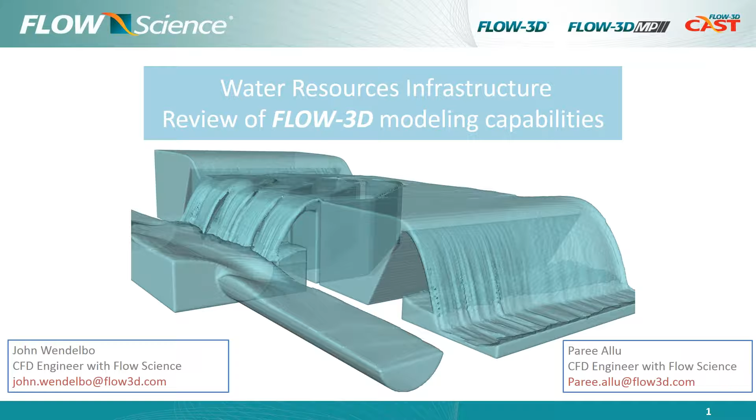And by the way, we have an amazing audience today with engineers from all over the world, from Egypt to the UK to United States, South America, Saudi Arabia, Canada, New Zealand, Australia, Malaysia, India, and Pakistan, and that's the list I have, but I think I'm missing plenty actually. So welcome everyone.

Okay, so instead of going through a list of applications today, I decided to organize topics in terms of physics and models. The idea is that you will all be able to recognize for yourself where these models fit into your own workflow. And if you have any questions, please do not hesitate to email, of course.

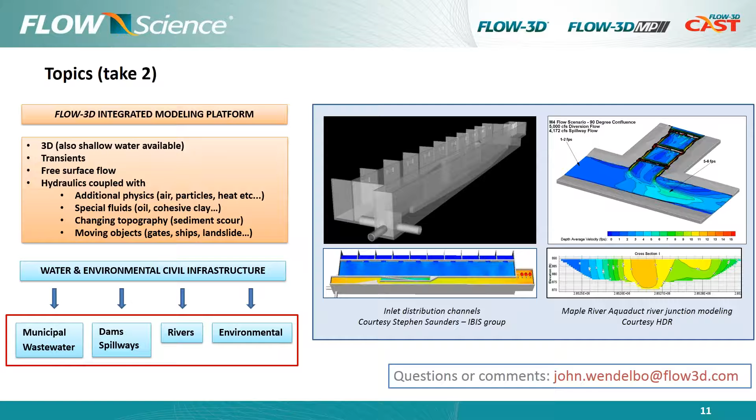These are all ideal applications for Flow3D. Just a selection here, but it gives you a sense of the things where we do very well. So I'll go through some different types of hydraulics that we deal with.

Start with complex free surfaces, and I differentiate that a bit from open channel flows. For instance, you look at the water behind the dam, it's fairly quiescent, but that's open channel flow. If you look at the water coming through the spillway, the aeration, the turbulence, the velocities, all that's quite a bit more energetic, and I think of those a little differently from open channel hydraulics. This is a model from colleagues in Germany, a Flow3D model.

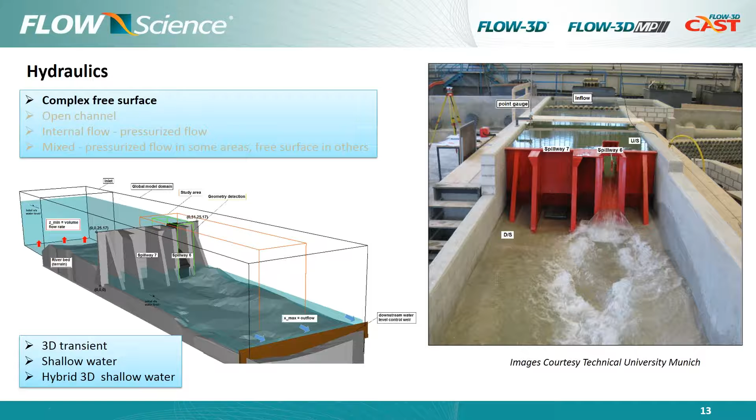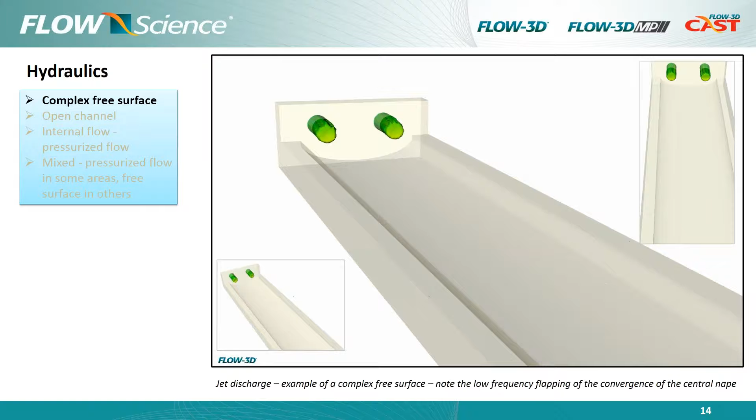So what do these complex free surfaces look like numerically? I like to show this example, it's a very basic one: just two jets, and we can look at the flapping of the converging flow in the central nape. This is exactly the kind of flow where the VOF method, volume of fluid method, especially the one-phase version we implement most often, is really invaluable. While this problem is in general quite a difficult proposition to model, in Flow3D, because of the way we do things, it's actually one of the easiest problems you can set up.

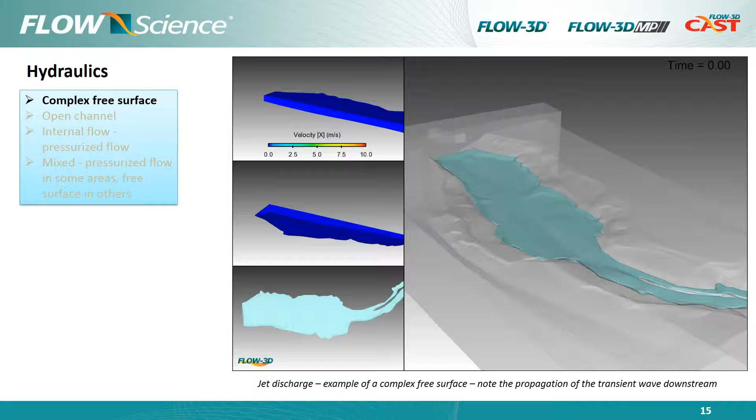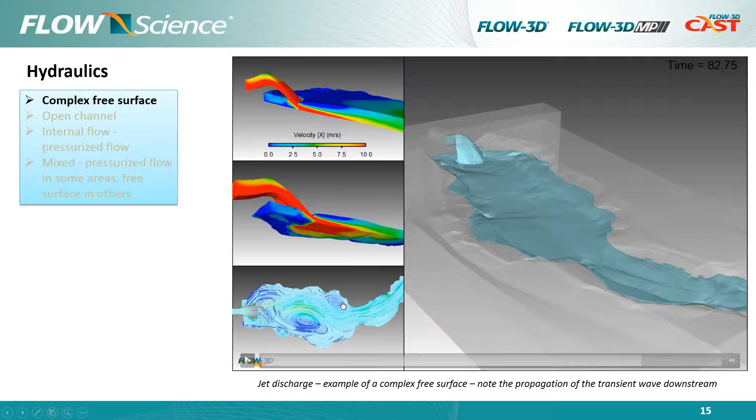A similar problem is the plunge pool, and I'll show you later how this is coupled with a sediment and scour model, and we'll see how the scour develops under the pool. One thing we're interested in is the detail of the plunge pool, but also the subsequent hydraulics of recirculation regions - all important for bank erosion. So that's also something you get out of these simulations. It's not just the hydraulics where the plunge pool impacts the water and hits the bottom, it's also the additional circulations that happen in this region.

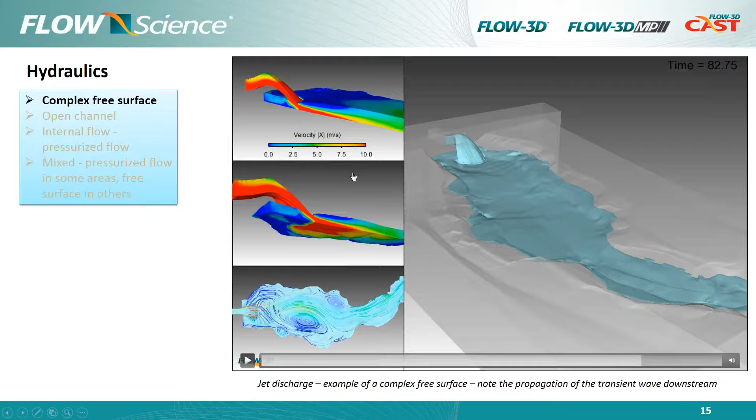Spillways are obviously perfect candidates. Normally Flow3D is used for discharge analysis as well as super elevation, cross waves within the spillway, those sorts of things. There's an entire presentation on this topic which I will point out to you later, I'll give you a link.

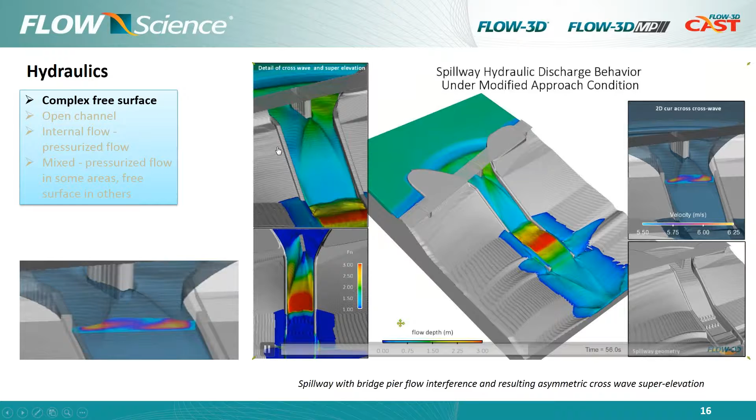So you can apply the same modeling to all sorts of situations, wet tunnels and CSOs in particular. We can look at the detail of diversion tanks, retention tanks, CSO structures, all in a very detailed and transient fashion, so we can really see the behaviors of the structure for given flow rates and different combinations of flows.

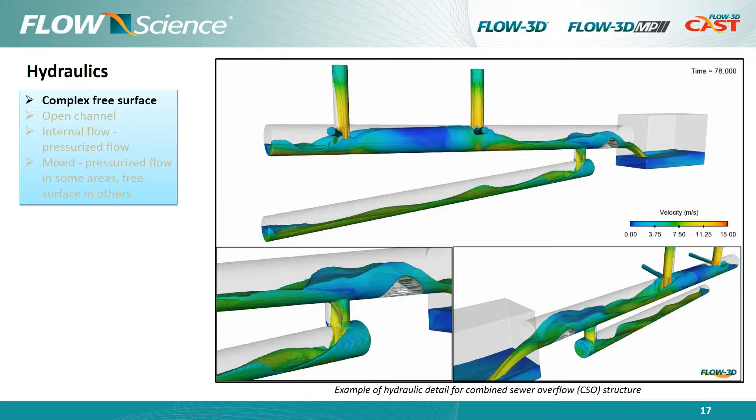Also hydraulic jumps, all those sorts of things reveal themselves nicely in 3D with 3D CFD tools.

Okay, I wanted to talk a little bit about PK-weirs, just because we've been doing quite a bit of work on this. Piano key weirs are being used more and more all over the world - Asia, Europe, United States, South America - and we wanted to see how well Flow3D performed for this type of spillway capacity analysis. So we've been doing a bit of validation on this, and so far it looks very good.

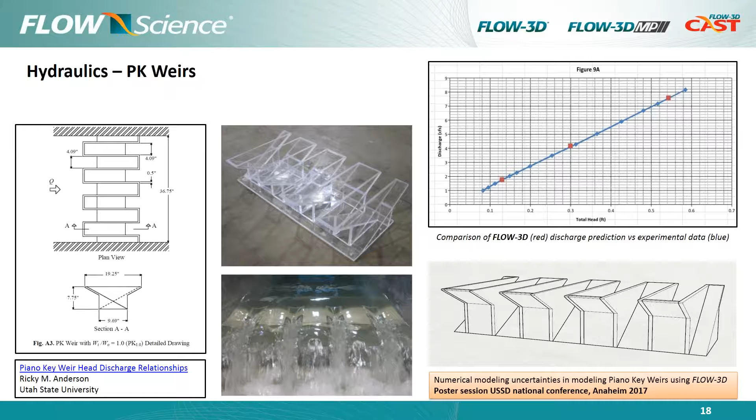And in fact, we'll be presenting this - we have a poster session and a paper at the USSD National Conference in just a few weeks in Anaheim. So if you're around, come and see us.

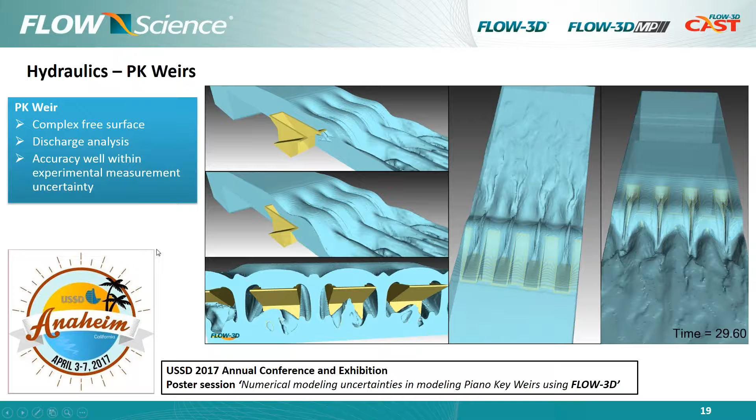All right, so much for complex free surfaces. I think you get the picture of what can be done and how it could apply to your problems.

So those sorts of things - reservoirs, rivers, waterways - at this point, probably 10 kilometers is the kind of scale at which you can still do things in 3D for a 3D solver fairly comfortably. Above 10 kilometers, it starts becoming a bit iffy in terms of hardware.

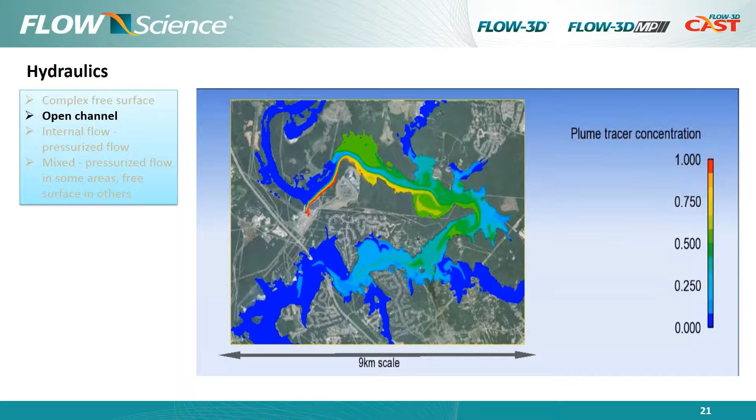Okay, so what I've done in this presentation is dispersed multiple links to papers. So if you download this, you can just click on these links - papers of interest on different topics throughout the presentation.

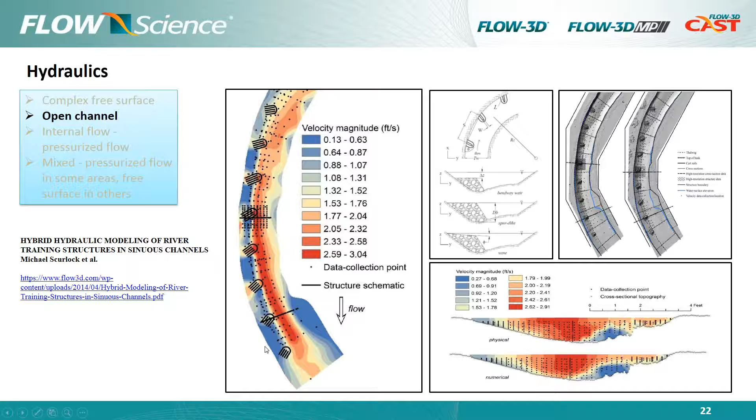And CFD tools are a great way to do that. You get a full 3D picture of the hydraulics, and you can move things around and rerun things very quickly. So very useful to see how structures affect the flow, and in turn, all with the goal of alleviating the erosion on those embankments.

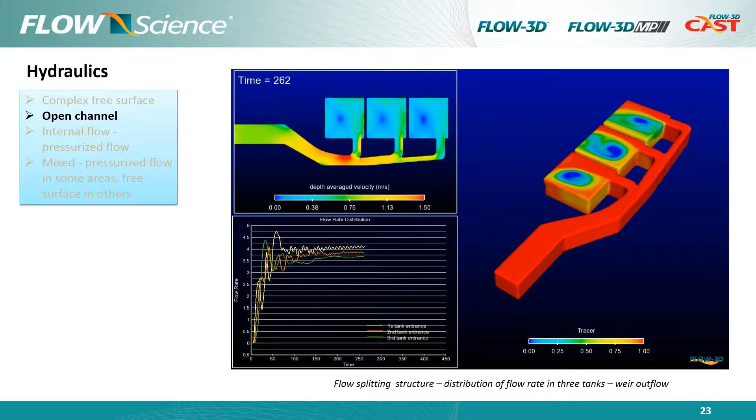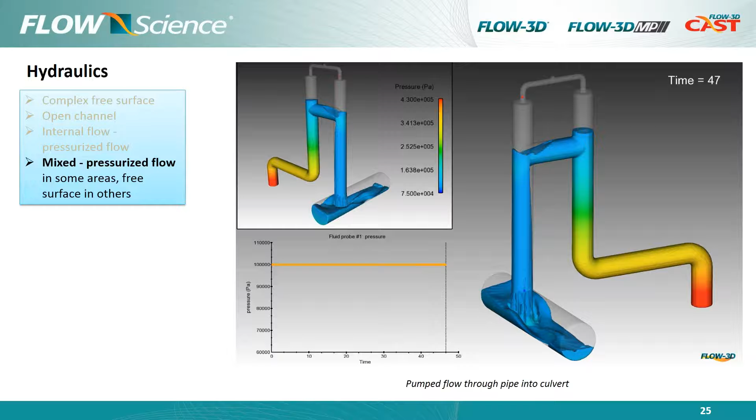In this case we have a pump here that's pushing water through the system, goes down into a culvert, and in fact this is inspired from another case where we had a series of these structures with multiple pumps. What we have here is a region where this is pressurized and then this is free surface. But it's completely seamless in the way we do things in Flow 3D, so there's really no added complexity there at all.

This is another CSO example, generic, but it's got some interesting features. First of all, this will pressurize, so we're going to continue feeding flow into this until it pressurizes, and in fact this region is pressurized. This region, because of the geometry, in fact never pressurizes, and then we have some weir flow up here.

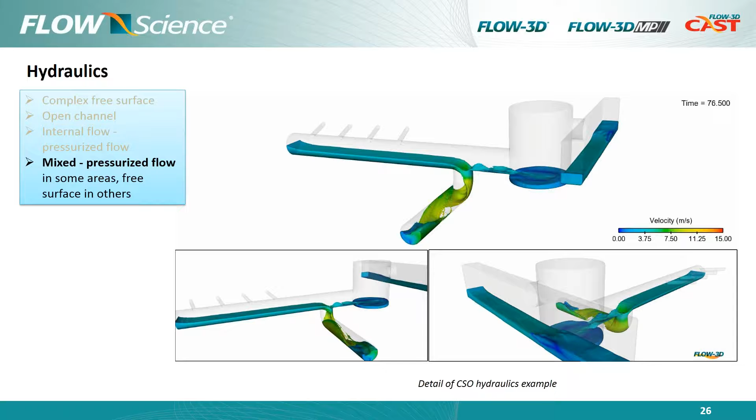You can learn a lot of the behavior of your structure for different flow rates, different storm surges and so on, and see at what points you will have discharge, which is presumably what you would like to avoid.

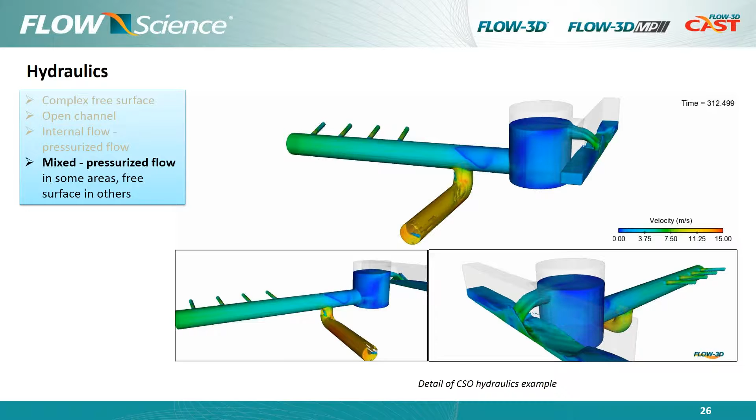You can't use the shallow water model in those circumstances. So there's one case where I thought it was quite interesting to have a 3D solution to look at the pressurization of that pulse as it moves upstream.

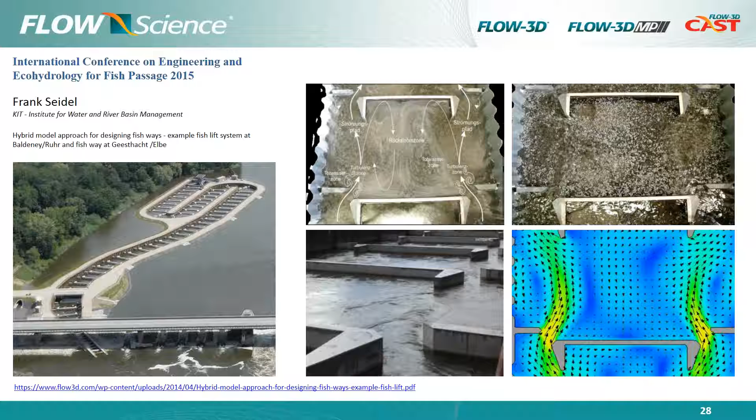I have another paper here, which you're welcome to take a look at. It's very interesting - some work done at Karlsruhe University, and they do a lot of fishway passages. What's nice about these types of simulations for fishway passages is you can get some very good detail into the recirculation zones, the turbulence intensity, the velocities, all of that. You get an awful lot of information using CFD tools, and it's been used a lot for this application.

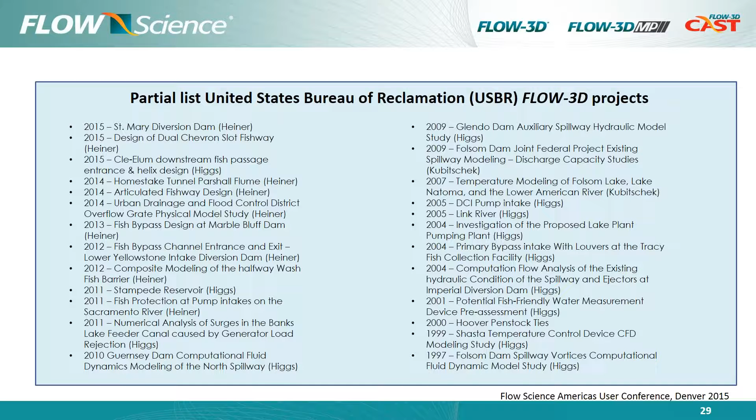In fact, we had a talk, I think 2015, yes 2015 in Denver. The USBR presented at a user conference, and this slide was, I thought, completely fascinating. It gave us kind of an insight into what they've been using. They've been doing CFD work for forever, since I think '97, and they've done all these - just a lot of projects, very cool projects, a lot of nice reports.

When you look at this list, you have a lot of fishway passages, fish bypasses, reservoirs, pump intakes, spillways - a lot of spillways. It's just an interesting list to see what people do over almost two decades. And the last one here, spillway vortices.

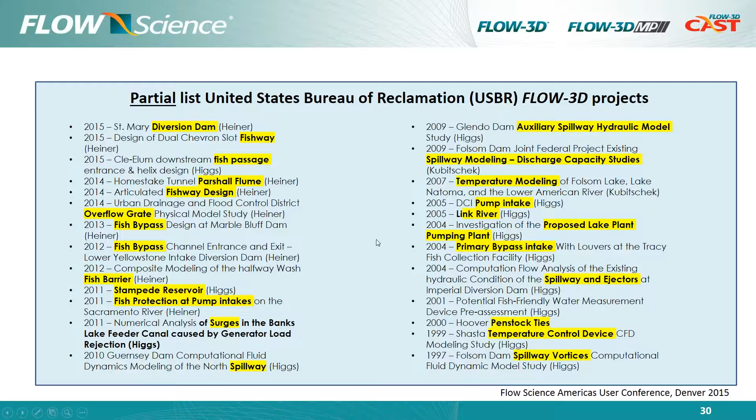I think in 1997 they probably had some difficulties with the computer hardware at the time, but now we can get quite good results. So speaking of gate vortices, there's something called a Q criterion.

So this is a spillway here, and we have a gate and the piers, and vorticity is generated around these piers, and it can be significant enough that you actually have void opening all the way to the gate. So there's some danger there, and there's a type of analysis called the Q criterion analysis, which is just part of the regular post-processing we have, and that identifies coherent vortices, vortex structures within the flow.

So you can see nicely here these multiple vortex structures originating from this pier. You can see a little bit of the depression at the free surface, but really the good information is to see where those vortices propagate in the domain. In this case, we expect it to be here, but it's not always the case that you know ahead of time where vortices will develop. So a nice tool for people working in this field.

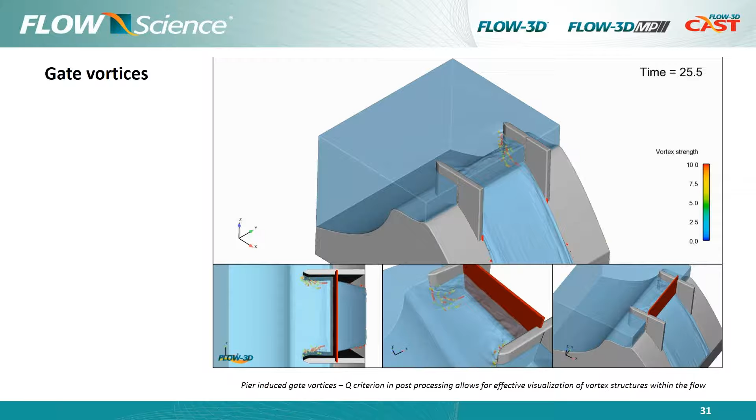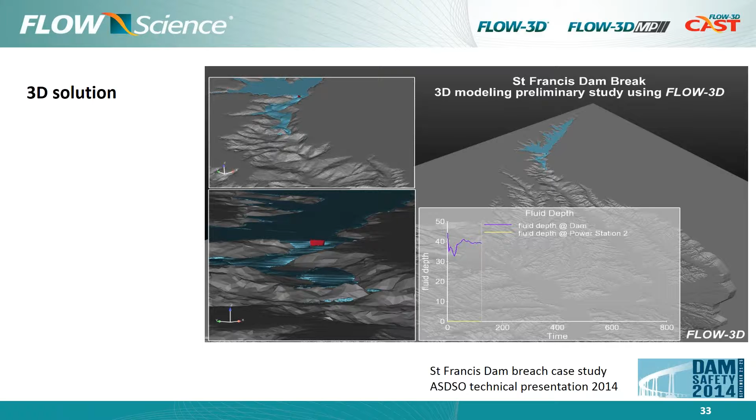You're going to see the super elevation here, the kind of banking around the domain. But that's a 3D solution, and that has limits. There's no way you can do the 80 kilometers in 3D, so we were interested in looking at that.

What we can also do is do the first portion where the vertical accelerations are expected to be quite strong in 3D, and then the portion that's in blue here is in shallow water. So it's a hybrid model - one model within Flow3D, but hybrid, where you say this region we're going to do a 3D analysis. By the way, this is a 40-foot tall wall of water breaking through here. And then we switch to shallow water.

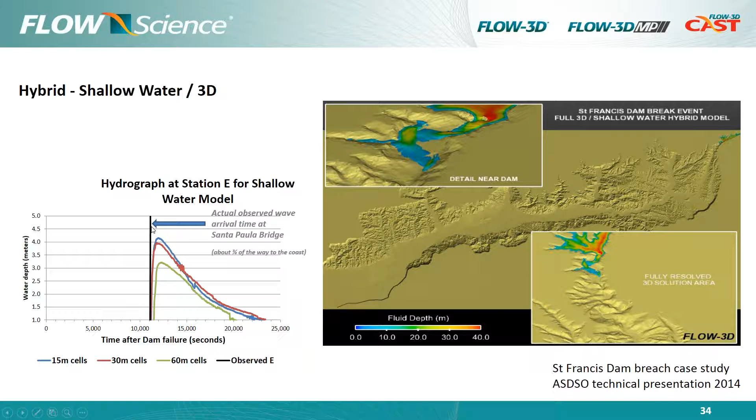So this validated very well. The difference isn't on this graph here, but between the hybrid and the shallow water version, the timing of the wave was impeccable. This is about two-thirds or three-quarters of the way down to the coast, and the timing of the wave was bang on the money. But the difference between the hybrid and the shallow water solution was that the hybrid, in fact, showed a higher wave elevation, and we don't have real data to calibrate the height, only the arrival. So we don't know exactly, but it was interesting that we had a higher wave crest using the hybrid model.

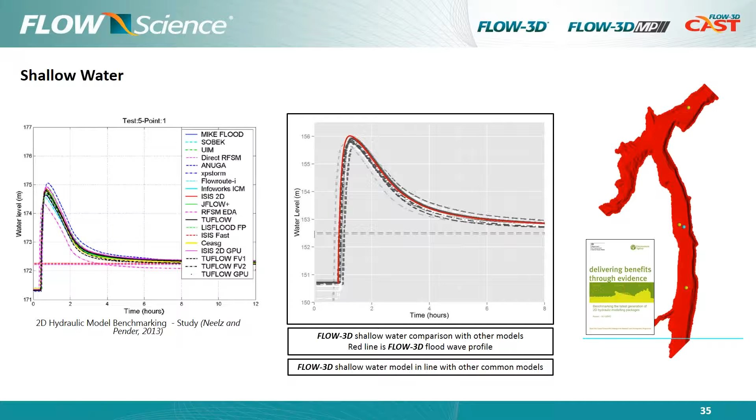For shallow water problems, there are a lot of codes out there, just dozens. So we got a little bit curious and looked at how ours compared with the other results. There's a validation, or comparison, that's been done with all these codes a few years ago. We looked at this data set, and in red is us, and it's good that we are basically on top of everyone else - just not better, but kind of the same as everybody else. So that's good in terms of verification and validation.

The key point of what I've said so far is that a lot can be learned looking at the hydraulics only. We can do an awful lot of things across all the many applications, municipal, dam, rivers, environmental, just looking at hydraulics, and those are some of the simplest things you can do in Flow3D. These free surface problems are ubiquitous, and Flow3D is just a tool that's simple, accurate, and robust for those types of things.

When you're looking only at hydraulics, and I can tell you because I've been doing this for a while, if that's all you're doing, it's really a straightforward setup and procedure in Flow3D to get those going. In fact, for many applications, you don't even need additional physics because the fact of the matter is it's all hydraulics, and so you can leave it at that.

Good news. So what's the workflow? For us, and for most packages I'd imagine, you start with your geometry, and that can be either your CAD, 3D CAD, or terrain from GIS or whatever. For us, we import 3D CAD in the STL format, which is a really quite universal 3D CAD solid format. And for terrain, we use the Esri terrain, quote unquote, ASC format, which is ASCII, so anyone can read it, it's universal. You don't need any special tools to open and obtain that kind of format. And of course you can mix CAD and built infrastructure with terrain, or just import your data, import your CAD, import your models, and it just builds an environment within Flow3D.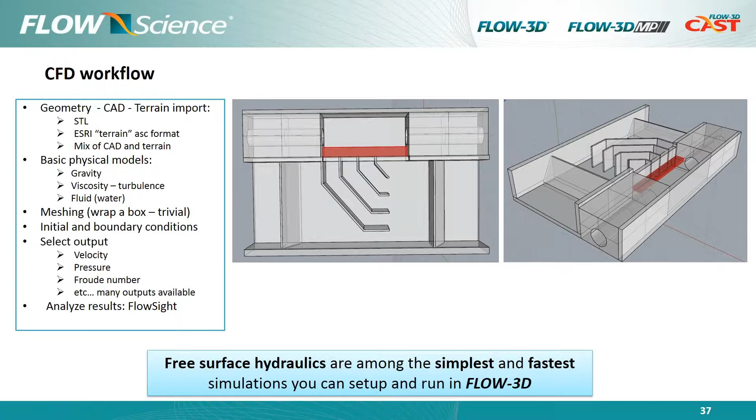So you'd start with some kind of structure from your CAD. As an example, you would import that into Flow3D, and then what we are doing here is we've defined some water at time 0.

This boundary here is just an outlet, so flow can leave. This is a weir, this is also a weir, and that's also a weir. And we have flow that's allowed, I think we have an elevation on this side, and then an outflow on this side. Flow is just allowed to leave. And then at the entrance here, we have a fluid elevation that's increasing with time, so you're going to see how that works out and propagates into the domain.

We have first a weir flow, and then, well, I'll let you see, this is a high flow rate, so we are at the limits of what this structure can handle. We have flow coming in, and then flow comes out this way, and some of the flow is diverted on this side.

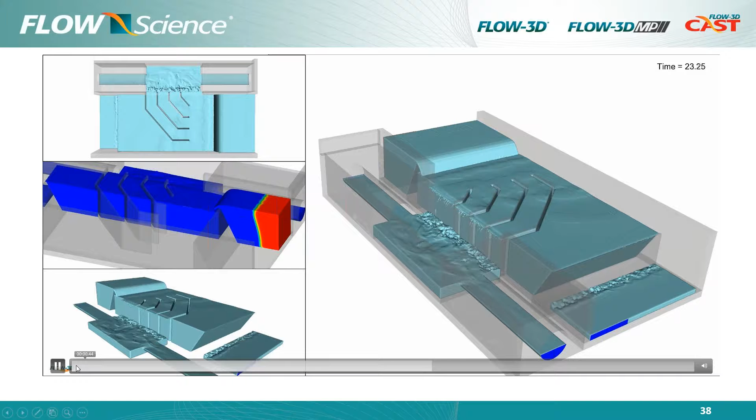So if you look, you can see the flow coming out over this way, the flow coming out on this side, and here we have a tracer just to see what's happening to the flow. A tracer is always useful to look at where things are going.

So again, the creation of the CAD environment, that's really important. Before you even open any kind of CFD tool, you need to have your CAD created, and that's not a CFD job, that's something done in CAD software. So the creation of the CAD environment is very important and can be time-consuming, especially if there's topography or field data that you need to kind of integrate.

Determination of the physics and flow environmental conditions, typically that's the hydrography or hydrology, that's key and can take time as well. What's important? Is it just water, or do I need sediment? Do I really need sediment, etc. So these are kind of questions that you determine ahead of time before you open Flow3D, and then you bring this into your CFD analysis.

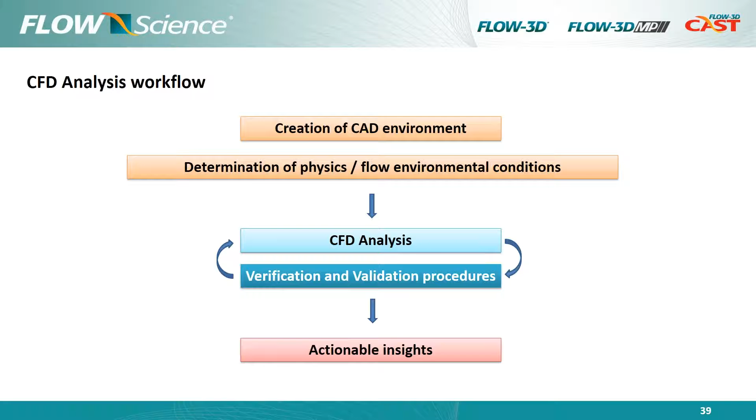This is a whole topic unto itself, but verification and validation is hugely important in CFD work. Especially if you're going to do this long term, you need methods and procedures in place, and it's only with those procedures that you can actually get actionable insights. If you do CFD analysis without this part, you don't get to the insights part - it's too much risk. There are plenty of well documented methods and tools, but I won't go into that today. It's important to be aware of that. Okay, so more details.

I've been through these hydraulics kind of quickly because I want to also talk about other topics, but there are other presentations, and if you download this presentation, these are all links to previous presentations. But they don't show you how to do it technically. So what I did is create a couple of video tutorials - I have more, in fact - A to Z tutorials where I show you the graphical user interface, the software Flow 3D, and go through all the steps describing what I'm doing. They take about 10-15 minutes and show exactly how it's done in practice. But that part is not really what I want to do in these webinars. I'm more interested in what we're doing, not so much the how. So these tutorials, I encourage you to take a look if you are interested.

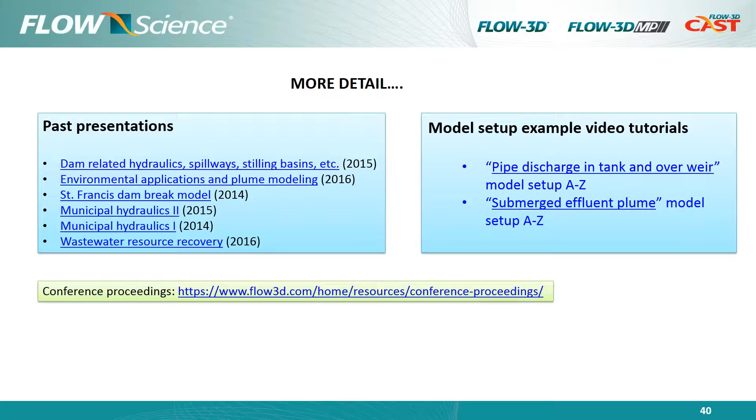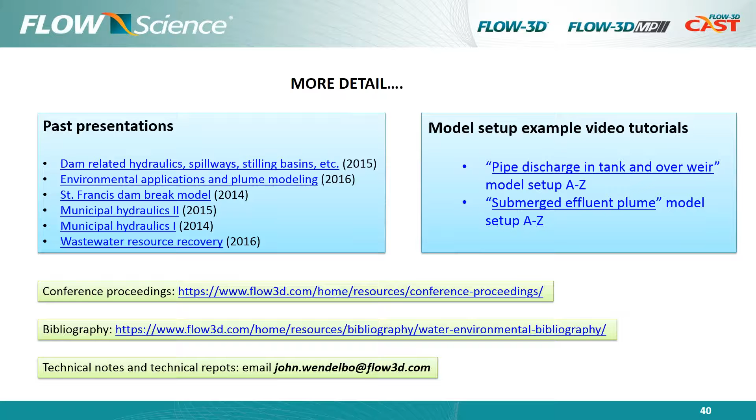And then more technical conference proceedings - you can search conference proceedings, and there's also a bibliography. It's all on the website, but there's just a lot of information. If you search topics of interest, things will come up usually, and then you can read what other people have done. We also have our own technical notes - there might be, but I don't think they're on the website, so email me if there's a specific topic of interest, I'm happy to dig those out. And I just noticed a spelling mistake here.

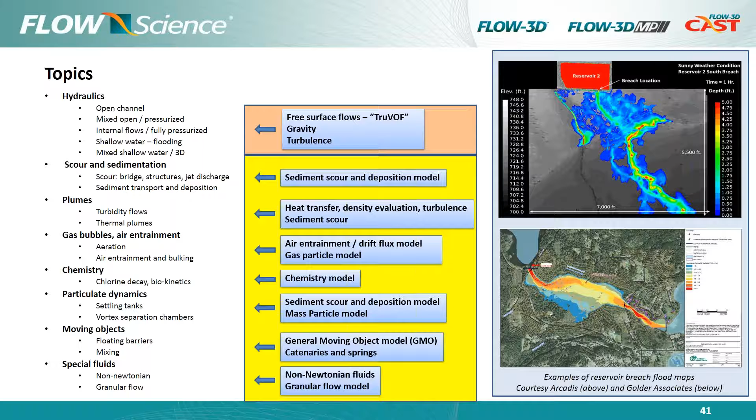Okay, so I spoke about the hydraulics - open channel, mixed open, pressurized, internal flows, all those things. I will now address some other topics. So take a sip of water. Okay, so sediment, plumes, gas, bubbles, all those things, all very, very interesting. Let's start with sediment.

So what we model - first of all, we model cohesive, non-cohesive beds. Cohesive is a whole different beast, so this model is for non-cohesive sediment. We model the settling of suspended sediment, we model the advection - the suspended sediment is carried with the fluid - and we model the entrainment of the sediment, so it's pulled off the bed and into suspension. Some of it is advected, some of it settles back and packs again the bed. And then we also have, as a transport mechanism, bed load transport and all this.

And we have two states, basically - we have suspended sediment or packed sediment. So we do all that, and then a few more things: angle of repose, Richardson-Zaki, those sorts of things. These are based on empiricisms, the critical Shields number in particular. But altogether, it works fairly well if you have a grip on an idea of what to use for Shields numbers and those sorts of things.

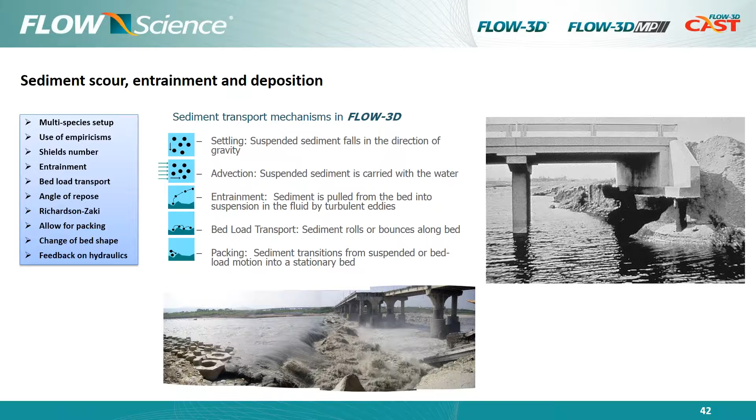So we can do multiple species - you can have the diameter for different sediment sizes, different densities, and then you can mix and match them, and create a substrate which has, say, 50% fine, 20% coarse, 30% medium. So you can create your species here, mix them all together as you want to for your actual substrates.

So these develop very typical patterns with some deposition in the back. And of course, what's nice is that once you've validated the basics of what's going on in a well-known case, you can move on to more complicated geometries, plunge pools or multiple piers and those sorts of things.

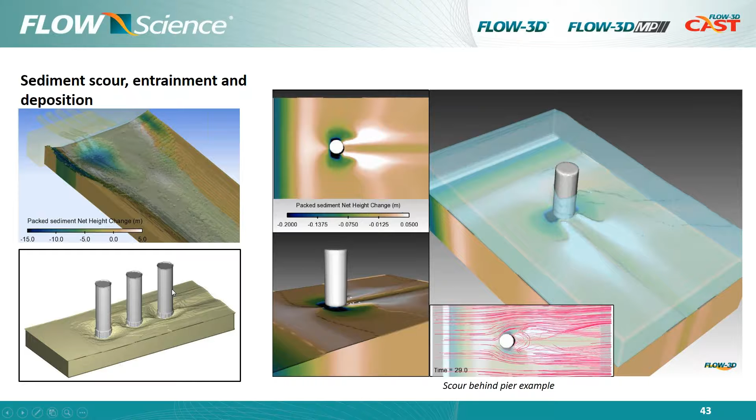So talking about the hydraulics, when we just had the hydraulics with a solid substrate, this would just make its way down. If you recall, there were completely different hydraulic patterns there.

What's happening with scour is that you dig a hole here, and you can see it from the top, and here from the side, and then eventually there's enough water that the shear stress at the bottom ceases to erode the bed, and you get this kind of equilibrium plunge pool behind the jet. So that's what we're after: the size and location of this hole, and possibly the deposition of sediments behind it.

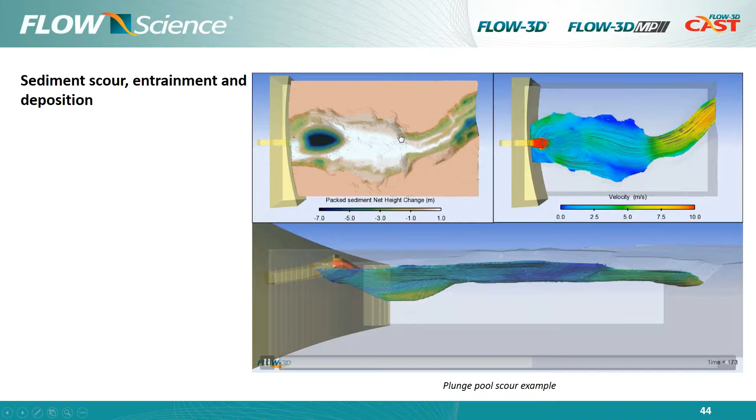As a matter of validation, there's a fairly famous experiment called Chatterjee from 1994. What's happening here is we have a jet coming out, this gate is in this position, and then this is a solid slab, and we have erosion and a change in the bed shape, coupling with the hydraulics and reaching equilibrium eventually.

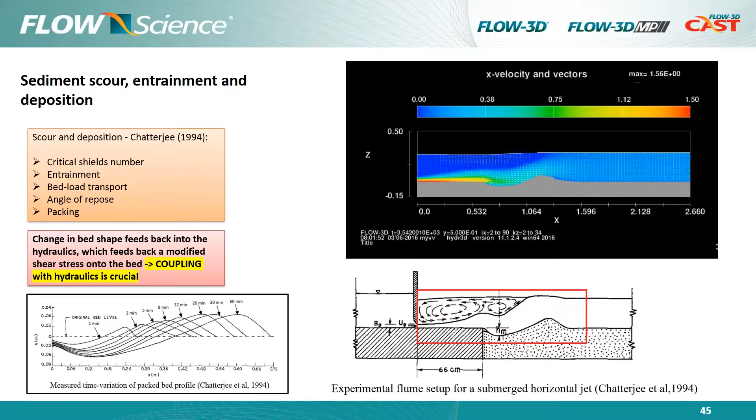This was an experiment, let's see if I can jump this. It takes an hour, so this is the final shape after 3,600 seconds. This captures, and this is a great validation, entrainment, bed load transport, packing, angle of repose. It captures all those mechanisms, and they're all important to the solution here. We want to make sure we're able to reproduce this, which fortunately we are.

A paper here was brought to my attention just a few days ago. It's very interesting, it's exactly this problem, a plunge pool looked at with three different perspectives, one of which was a FLOW-3D scour model. I thought that was interesting, so here's the link to take a look.

So we have the pool here, and the question is where are they going to build some remediation, and where to do that, because there's a lot of construction involved. They're able to get a handle on the scour, the depth, and the location, all those things. Combining this with two other methods, which basically all point to the same outcome, gives you extra confidence that you've performed a correct analysis.

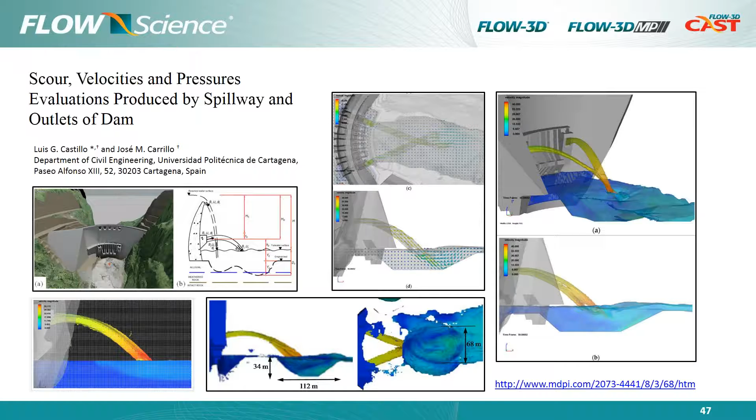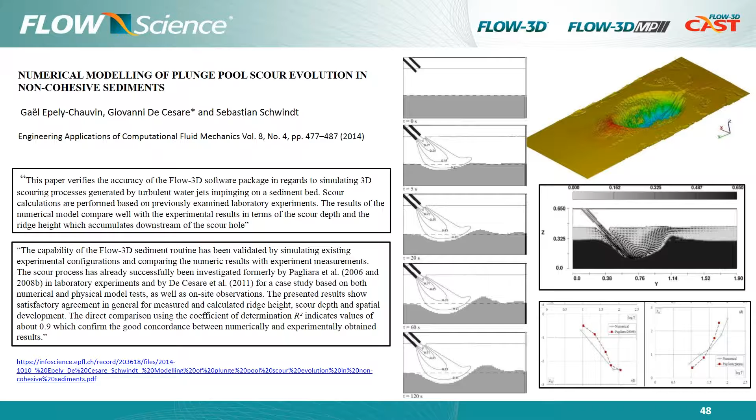And then here's another one, which you're welcome to download. This paper is actually trying to specifically validate FLOW-3D, so I was quite happy that it worked out pretty well for this problem. This is from, I think these guys are in Lausanne if I'm not mistaken, I should have mentioned that on the slide. I think it's EPFL.

I had to show this because I've never actually seen this before. This is a turbine that's activated by tides, I think, so this turns. There's some vorticity that goes behind, and there's the tidal signal on the pier itself, and they're looking at the scour behind this structure. It's really quite cool, so that's another reference.

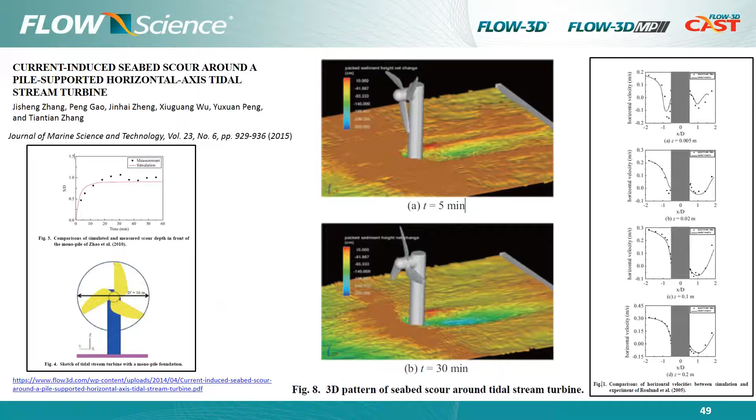Thermal plumes, I like to show this slide because it shows the mixture. This is warm water coming into a basin, so it's a jet. It has some features associated with momentum plumes, but it's also lighter than the surrounding field, so the buoyancy will participate in the turbulence, but also the water generally will rise upwards.

We've added particles of different sizes, and you can see the heavy ones, via the sediment scour model, just basically drop right away. They're too heavy for the flow to really entrain them. The intermediary sizes, some particles are able to make their way out, and then the lighter ones, 100 microns, just basically follow the flow.

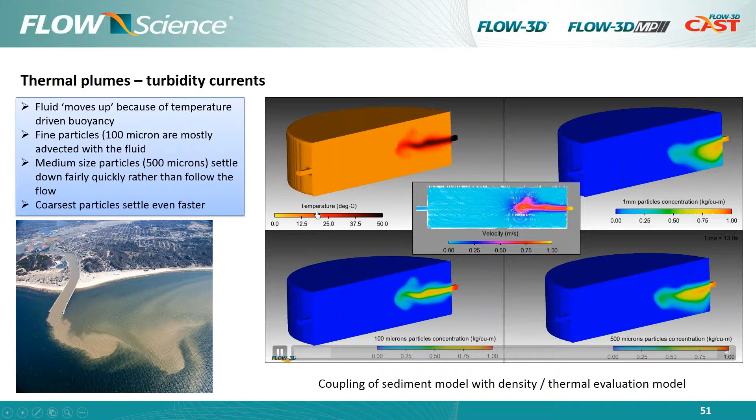So these are the dynamics that come into play in turbidity currents. What's nice today is that with computational power, we can do both the near field and the far field for these plume problems together. We don't have to separate them like we used to, with a separate simulation for the near field and the far field.

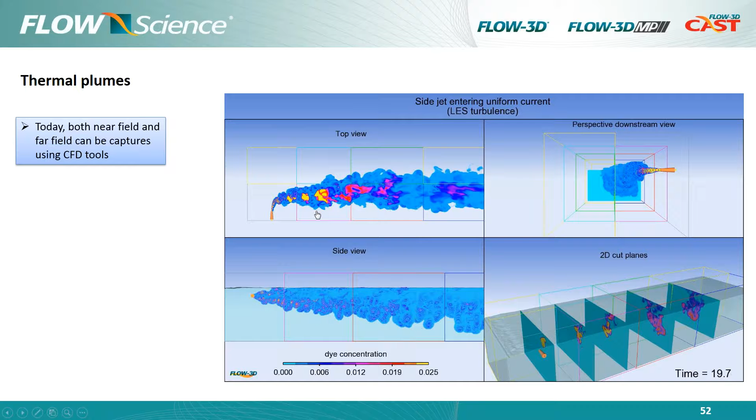And if you look at a larger scale, on the order of kilometers, we can have your plume coming out, and then detail about the regions of where you have warm water. You can place probes, so there's a lot of post-processing you can do that's very useful for giving you insights about what's actually going on at different locations in the flow.

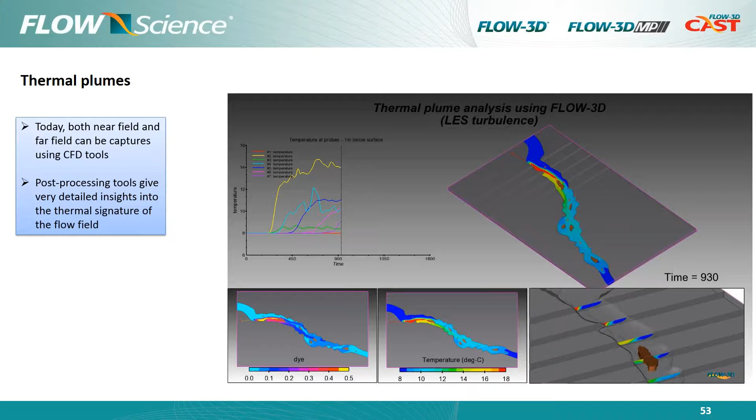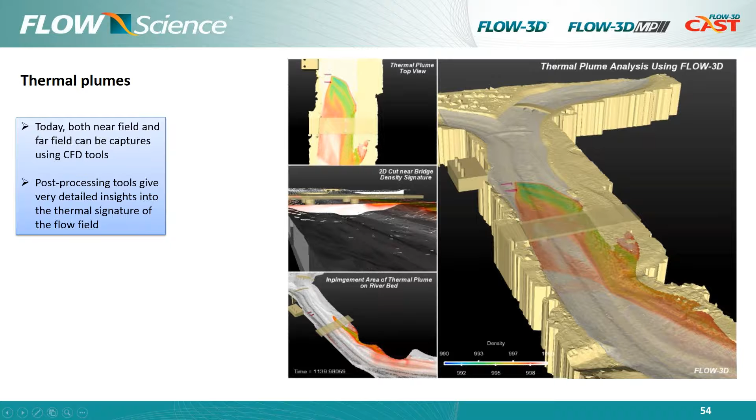As an example of post-processing, in this case with a plume as well, what we're doing on the lower part here is coloring the riverbed by temperature. So this is not about the fluid, it's about where warm water impacts the benthic community in this area. I thought it was a very interesting way of looking at the temperature signature, not just in the fluid, but on the riverbed.

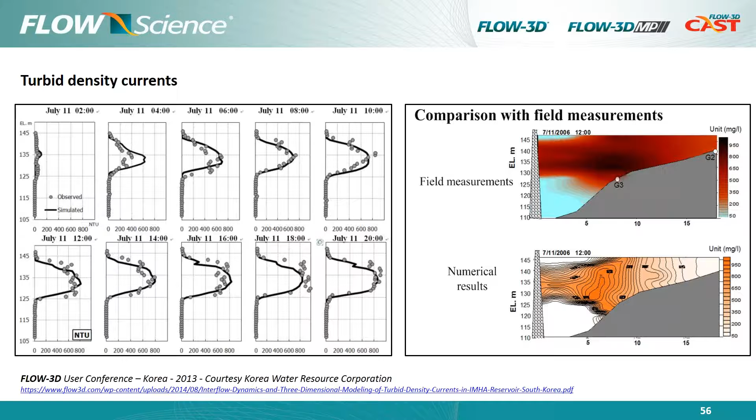For turbidity currents, I'm going to reference this paper. Really great - the river storm inflow basically plunges down, so the water seems clear at the surface, but in reality what's coming out is very dirty and full of sediment. They were trying to model this, and I'll show you some results comparing field data and numerical results. It's really good, same here with the turbidity. There are some other slides with the temperature in there which I don't have here, but they are in the paper. It's a good example of this kind of analysis.

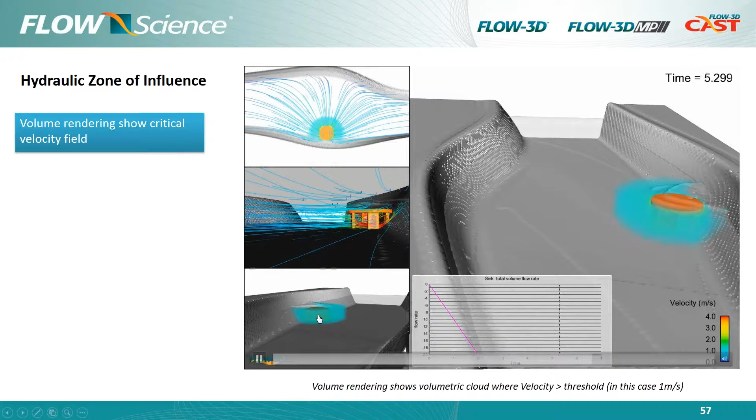In these regions, the flow is going into the pump, and the flow is greater than 1 meter per second there. So you can do all sorts of thresholds - it's very interesting. These are the streamlines, and this is a view from downstream. Okay, so much for that.

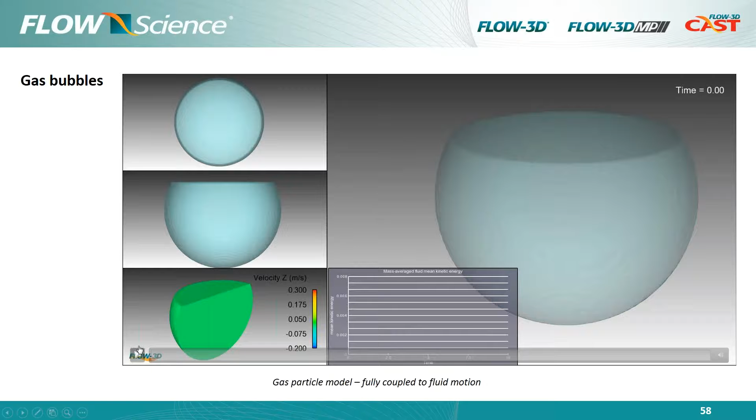I want to talk about bubbles a little bit. It's a new model in FLOW-3D. What's happening here is we have gas bubbles - we used to have mass particle bubbles, mass particle particles. Now we have gas particles, so they have buoyancy, they have size, and they are fully coupled with the surrounding flow. When you have a jet of bubbles, it entrains the water around it, and that's why you have this recirculation of water and this plume coming up and pushing up, bubbling at the water surface. That's a very interesting new development, very relevant for aeration tanks.

This is an example of a circular one, with bubbles coming up and this recirculation being induced by the bubble motion. You can also apply this to larger scales - it's a very efficient model, computationally it's not a problem.

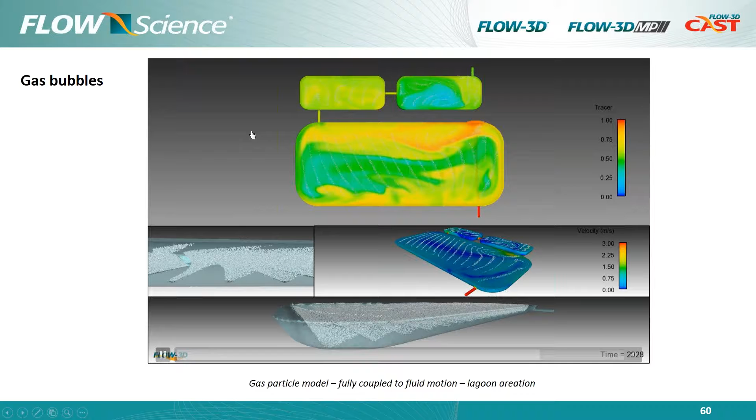This is vastly accelerated, that's why it looks a bit crazy, but it's a large-scale lagoon. What we're looking at here is the fluid coming in, making its way through, and then back and back - it circulates like this generally. We have the interference between the bubbles, which are supposed to keep everything both aerated and suspended, and the actual flow. So these are all coupled.

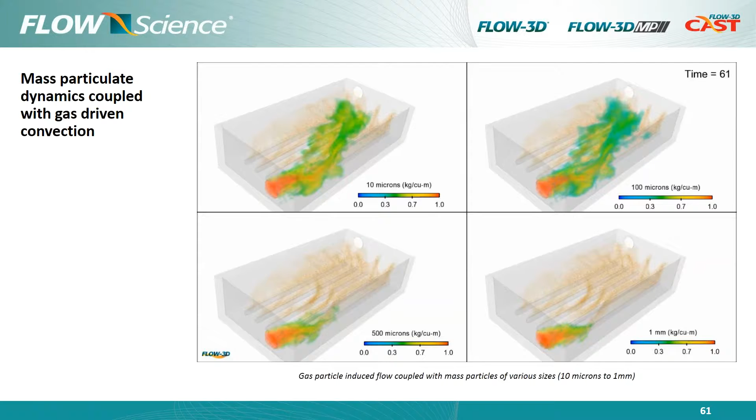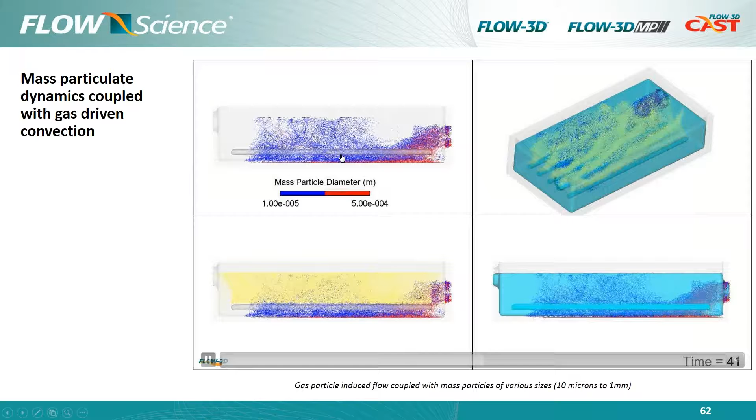This is the same thing, but separated into two particle sizes. You can see how the blue particles, the lighter ones, really stay entrained, whereas the red ones, which are heavier, sink down and are not able to be lifted up by the induced current.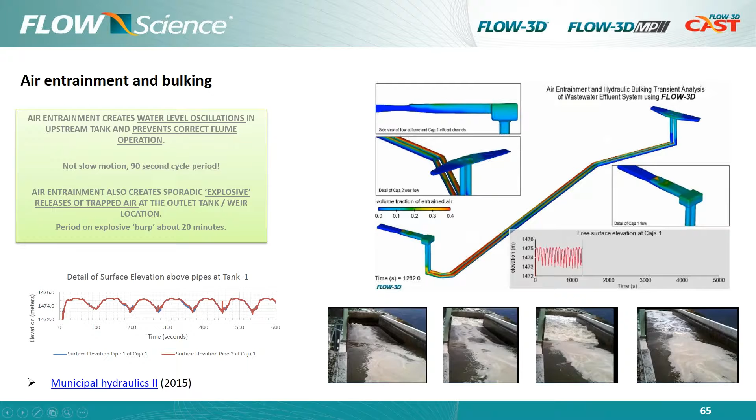Finally, we have a new development with our air entrainment model: we now have a dynamic drop size. It used to be a fixed drop size, which isn't very physical - it was a start, but not very physical. Now in the air entrainment model, the size is dynamically changed according to coalescence and breakup based on turbulence and a couple of other parameters.

There's a paper on this validation, and it's really good. We have data from Zurich, and we're able to get some very good results there. That's an exciting development, because a lot of work is happening right now at multiple institutes around the world on aeration of these types of spillway structures.

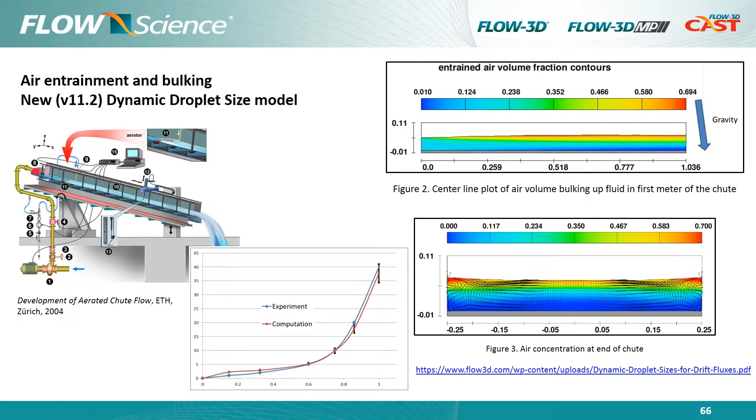Conversely, you can have siphon or negative pressures build up. This is what I showed you earlier with just pure hydraulics, no air entrainment, and no pressurization of this void that has evolved. We can also pressurize voids in Flow3D.

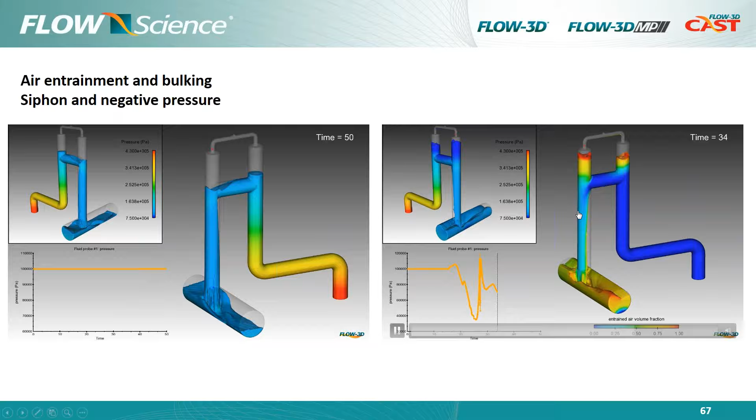When you include air entrainment, things can become more realistic, and I can tell you this is in fact a real scenario that did actually happen, something very similar to this. What happens is you have this kind of choking, and you can have violent behaviors because this void becomes depressurized - that's in fact what is happening.

It only happens in certain specific flow conditions, when this gets trapped and removed from the atmosphere - there's no pathway here from this void to the atmosphere. So different behaviors, and it's really amazing how often you see behaviors with air entrainment that are quite different from what you'd expect from pure hydraulics. This is seen in real-world applications.

Last thing on particulate dynamics, I think, settling tanks. In this case we use a slightly different formulation of the sediment model - this time the settling velocity is based on concentration rather than drag and those sorts of things. It's much more realistic and you get good results. There's a previous presentation that focuses on this as well.

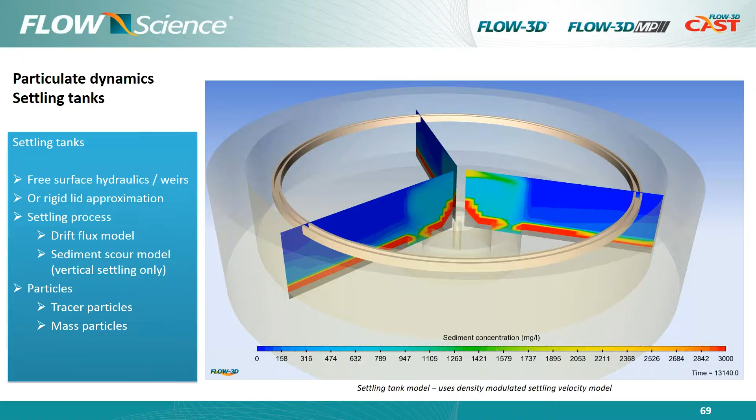For this one, finally, a vortex chamber. The large particles tend to go out through the bottom here, and in this central vortex, the lighter particles escape through the top. You can measure exactly what's leaving of each particle class, each particle size - some leaving through the top, some through the bottom, and you can differentiate between particle sizes, making for fairly precise design based on what particle sizes you're trying to remove and which to keep, based on flow rate and other factors.

You can see here the central vortex, these leaving through here, and the other ones, the heavier ones, leaving through the bottom escape.

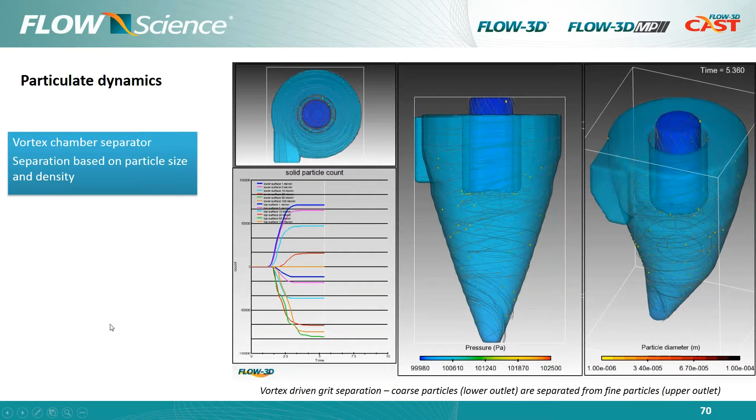Okay, so chemistry a little bit. Very straightforward actually, just put in your kinetics, and in this case we have just chlorine is injected. This is a common test: you put a pulse of chlorine and see what comes out on the other end.

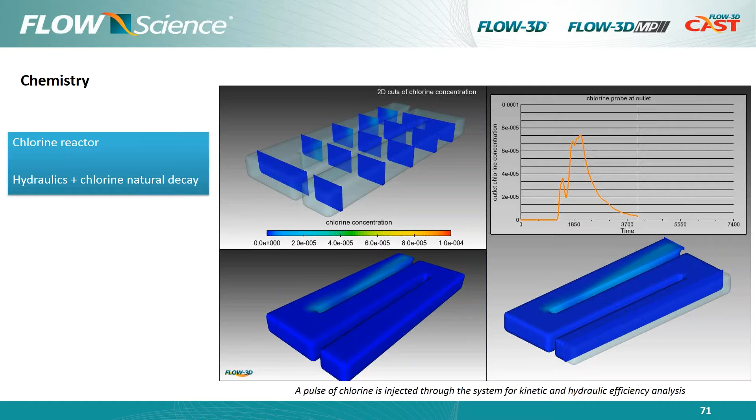You can couple this with biokinetics, so the chlorine reacts with an organism. At the entrance of the structure we can have, say, 1 million organisms per cubic meter, and then see how many of these organisms have been removed by the time you leave. In this case it's not 100%, it's 90%. So you can couple the kinetics of chlorine decay over time and water, with the reaction with organisms and the consequent organism decay, and that's all coupled with the hydraulics. That's a common application.

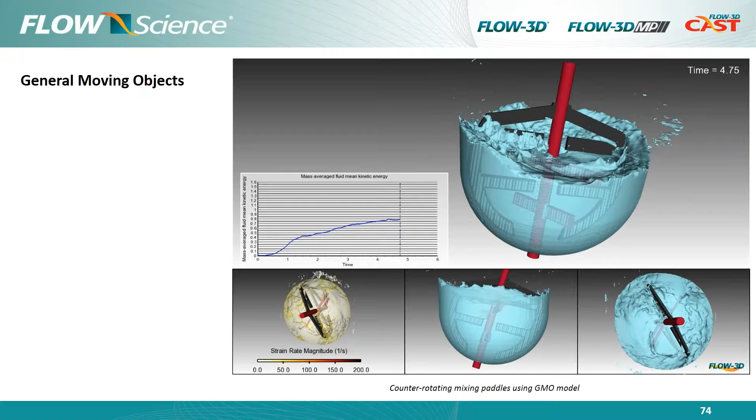General moving objects, just a couple of examples to show how these things move around. This is a mixing tank with 2 paddles counter-rotating. It's not a very complicated simulation. This one is quite splashy, but that's because they're moving quite fast.

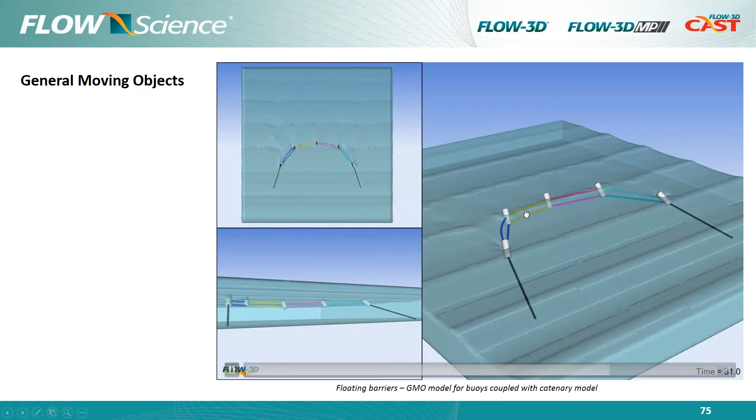With catenaries, we can couple those with floating GMOs, which are moving objects, and look at floating barriers and how these things behave under a wave train or currents. These are floating catenaries, floating objects, all coupled together, and moored to the bed here and there.

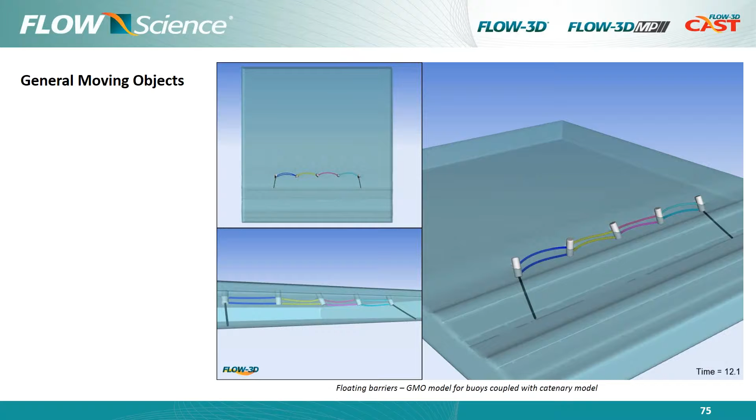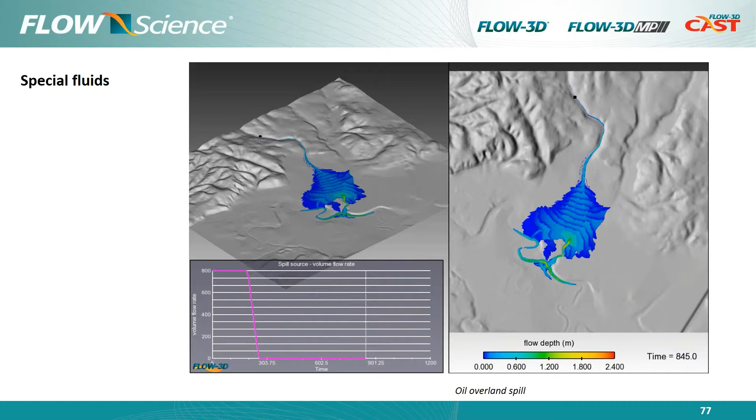Okay, and then the last topic, briefly - it's been about an hour. Not everything is made of water. We can vary density, viscosity, those sorts of things when doing an overland spill, whether it's oil or any other fluid - not a problem. This can be shallow water or 3D.

An interesting one here is bitumen, in which case naphthalene evaporates. As the naphthalene evaporates, the density of the fluid changes. So as this is spreading out, there's an initial phase where naphthalene is evaporating and the density of the fluid is increasing. Once there's no naphthalene left, it's just pure oil, and since there's nothing left to evaporate, the density stays constant.

The same thing happens with the viscosity - while this is happening, the viscosity is also changing. It's not shown on this, but it's part of it. So there's a phase change and also a dependency of viscosity with, in this case, the naphthalene content.

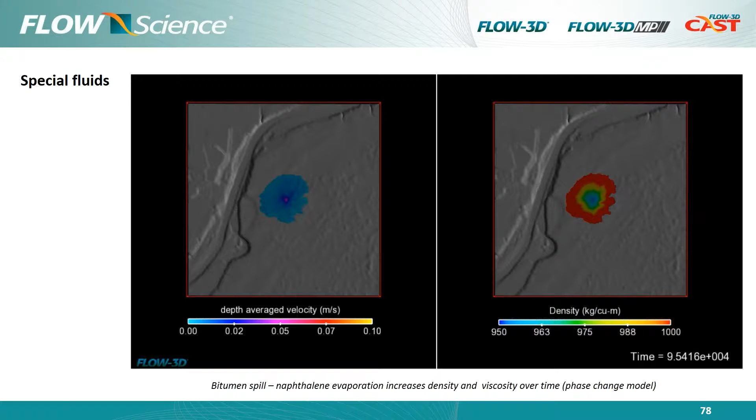Okay, and then Bingham plastics. Many fluids are not, in fact, Newtonian, especially when they become cohesive soils - a case where you have distinctly non-Newtonian behavior and where the sediment scour model completely collapses. For cohesive soils, in this paper from a user conference, they used a Bingham plastic to model the cohesive soil, and had good results.

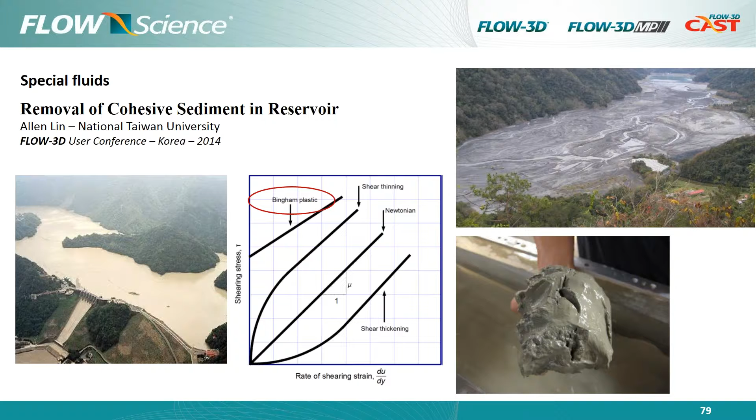So that's it from me. What I hope to have shown is that FLOW-3D offers a vast array of modeling capabilities, relevant to various aspects of the water and environmental industries. It's a modeling platform that is both powerful and versatile, and from extended usage, I can tell you it's also quite easy to learn and to use.